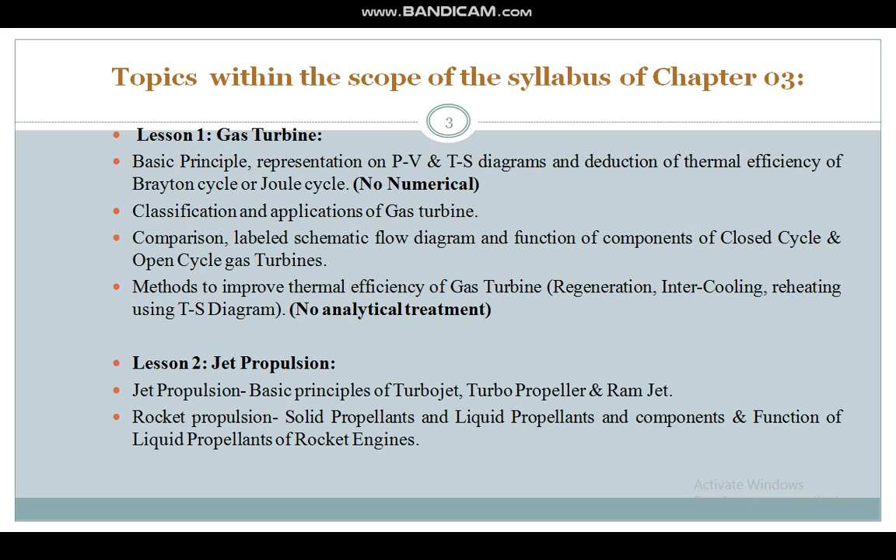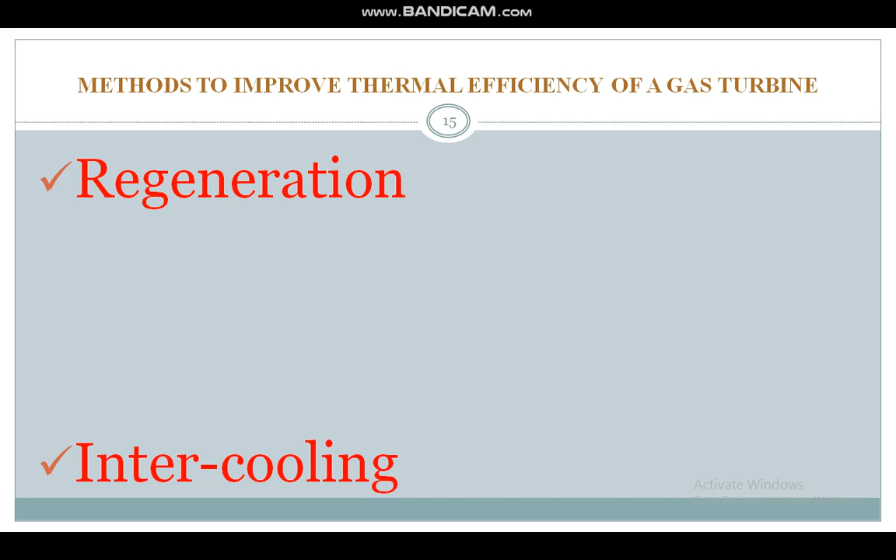There are mainly three methods for improving the thermal efficiency of gas turbine: regeneration, intercooling, and reheating.

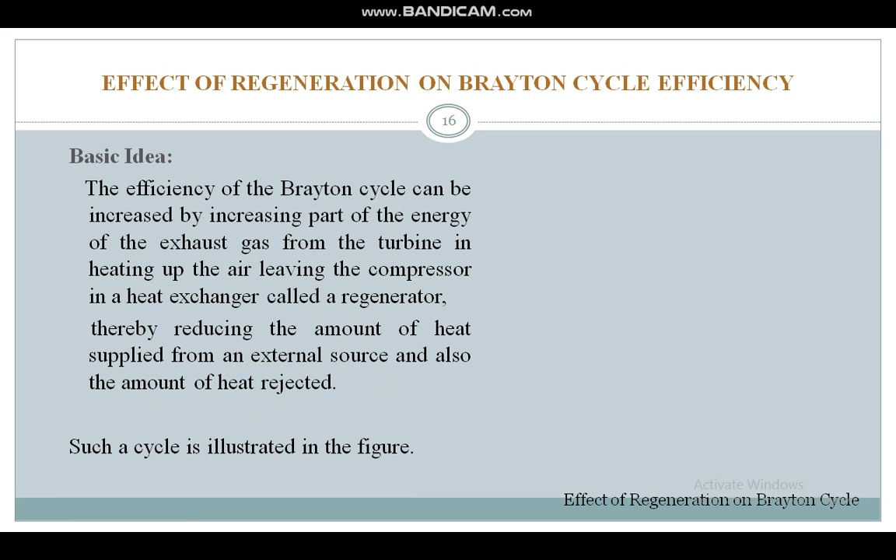Let us first talk about the effect of regeneration on Brayton cycle. Now, what is regeneration? What is the basic idea? The efficiency of the Brayton cycle can be increased by utilizing part of the energy of the exhaust gas from the turbine in heating up the air leaving the compressor in a heat exchanger called a regenerator.

If you look at the figure, this thereby reduces the amount of heat supplied from an external source and also the amount of heat rejected. Such a cycle is illustrated in the figure.

The temperature of air leaving the turbine at 5 is higher than that of air leaving the compressor at 2. In the regenerator, the temperature of air leaving the compressor is raised by heat transfer from the turbine exhaust. The maximum temperature to which the cold air at 2 can be heated is that of T5, the turbine exhaust temperature. But practically this is possible only in an infinite heat exchanger, so in real case, T3 is less than T5.

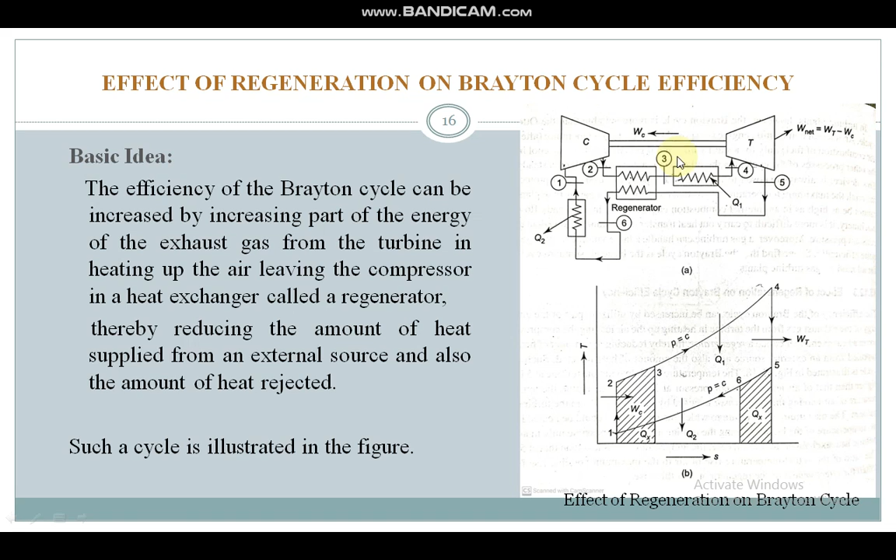The ratio of the actual temperature rise of air to the maximum possible rise in air is called the effectiveness of the regenerator. In this case, effectiveness equals the practical increase, T3 minus T2, divided by the theoretical increase, T5 minus T2.

When a regenerator is used in the idealized cycle, the heat supplied and the heat rejected are each reduced by the same amount. The mean temperature of heat addition increases and the mean temperature of heat rejection decreases because of the use of regenerator. Thus the efficiency is increased as a result, but the work output of the cycle remains unchanged.

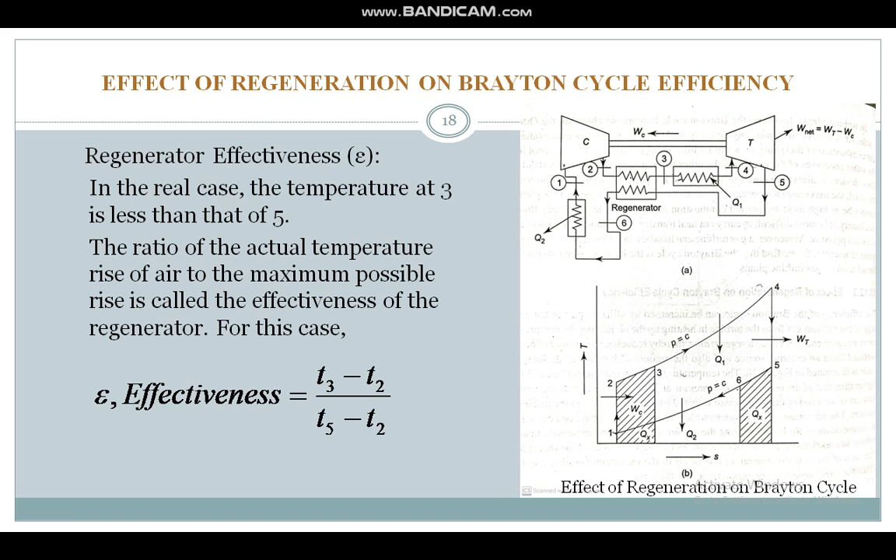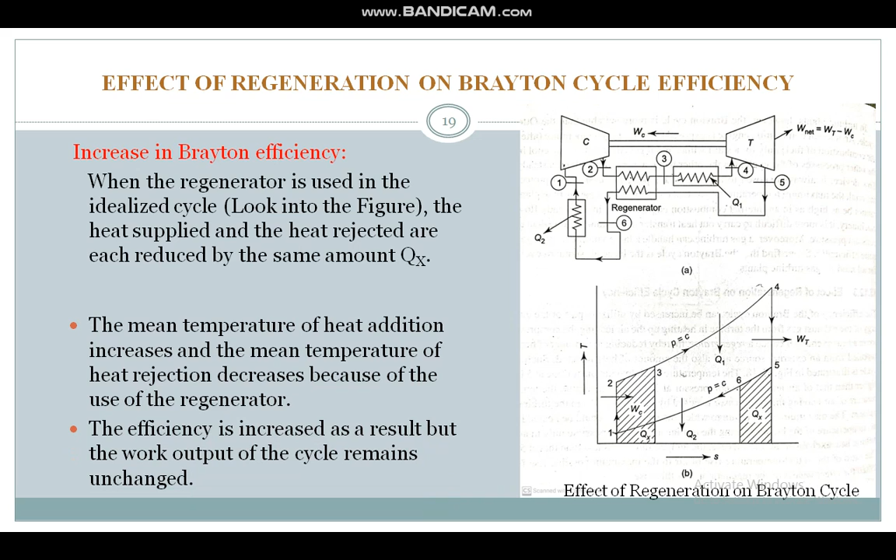Because the mean temperature of heat addition increases and that of heat rejection decreases, the efficiency increases. These are the basic equations of regeneration.

Now some issues: in practice, a regenerator is costly, heavy, bulky, and causes pressure loss, which brings about a decrease in cycle efficiency. These factors have to be balanced against the gain in efficiency to decide whether it is worthwhile to use the regenerator or not.

Above a certain pressure ratio, the addition of a regenerator causes a loss in cycle efficiency compared to the original Brayton cycle. In this situation, the compressor discharge temperature is higher than the turbine exhaust temperature, so compressed air will be cooled in the regenerator and the exhaust gas will be heated, and our purpose will not be fulfilled.

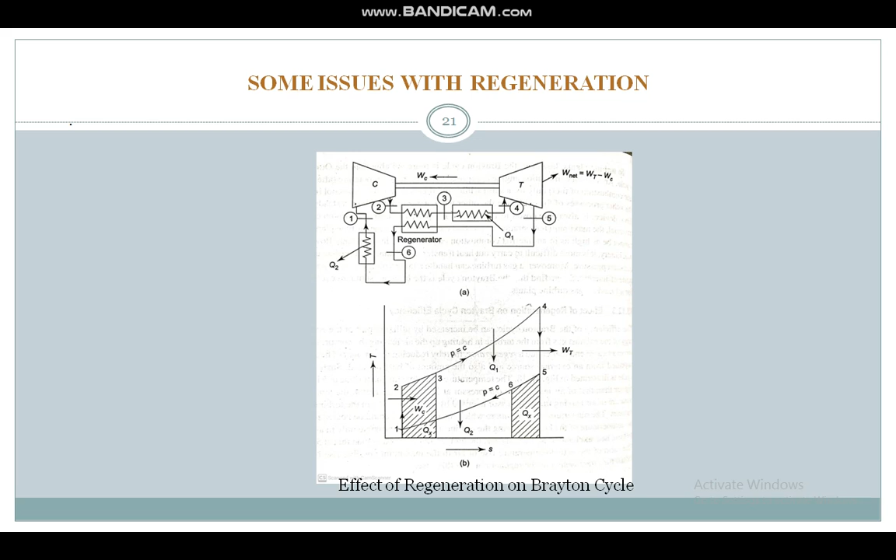As a result, both the heat supply and heat rejected are increased. However, the compressor and turbine works remain unchanged, so the cycle efficiency decreases. Also, there are irreversibilities involved in the turbine and compressors, and the Brayton cycle is highly sensitive to real machine efficiencies of turbine and compressor.

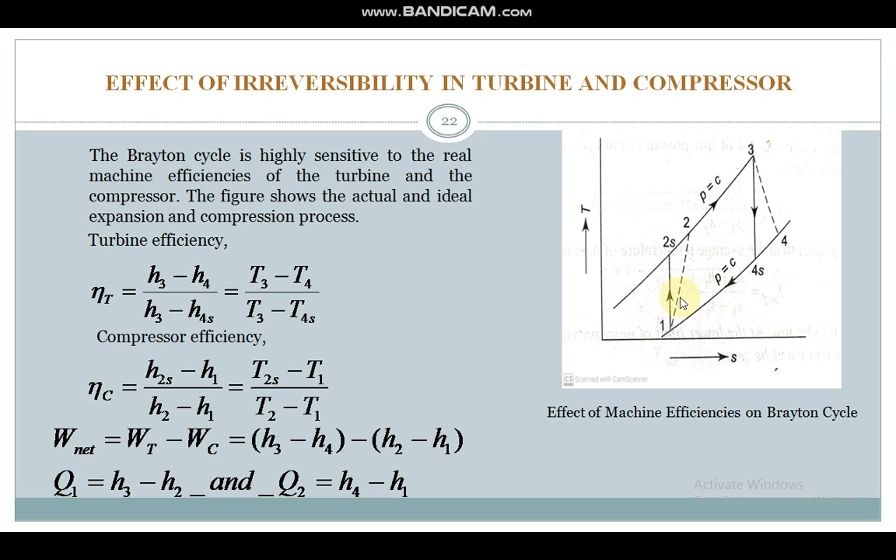For example, 3 to 4s is the isentropic process, but because of irreversibility, the actual process is 3 to 4. So clearly the work obtained from 3 to 4 in the turbine is less than the work obtained from 3 to 4s. Similarly, work consumed in the ideal case by the compressor is H2s minus H1, and in the real case it is H2 minus H1, which is more than H2s minus H1, as seen from the figure.

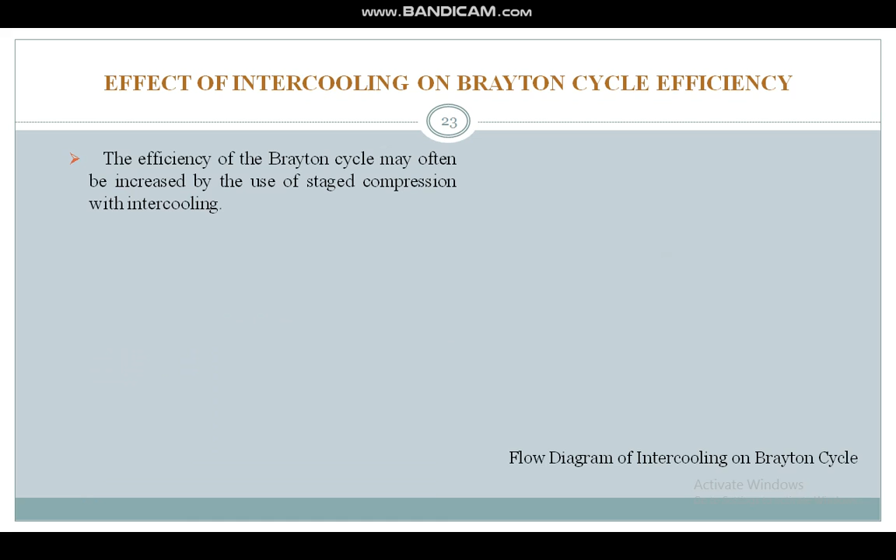Now let us discuss the effect of intercooling on Brayton efficiency. The efficiency of the Brayton cycle may often be increased by the use of staged compression with intercooling. Let the compression process be divided into two stages.

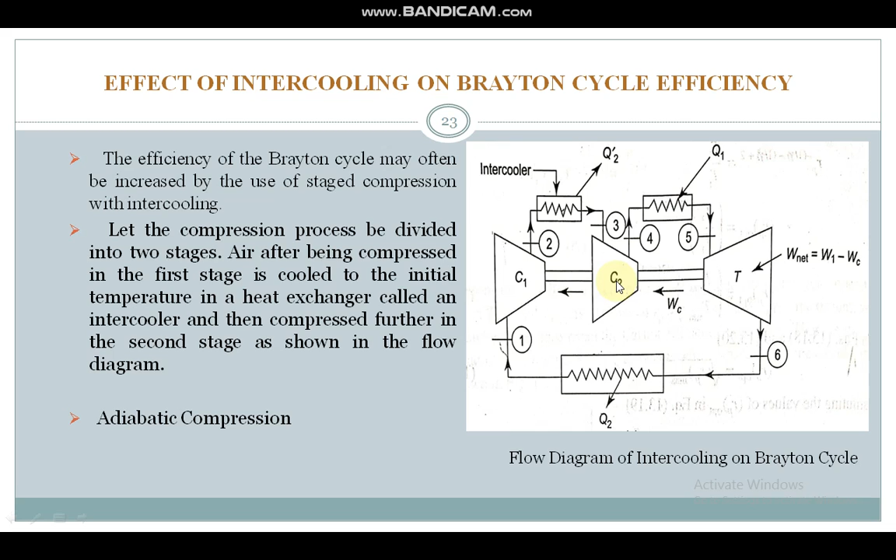Air, after being compressed in the first stage, is cooled to initial temperature by means of an intercooler. After initial compression, T2 is brought down to T1 and then sent back to the second compression stage. It will be more clear if you look at the TS diagram and PV diagram in the figure.

1 to 2 dash to 5 to 6, this was the basic cycle without intercooling, having single stage compression. And 1-2-3-4-5-6-1 is the cycle with intercooling, having two stage compression. Thus the portion 2-3-4-2 dash is added to the basic cycle, so the area increased, meaning work obtained, will be more. Now there is more heat supply also.

For the cycle 2-3-4-2 dash, Tm1, the mean temperature, is lower, and Tm2 is higher than that of the basic cycle 1-2 dash-5-6. So the efficiency of the cycle reduces by staging the compression and intercooling.

But if a regenerator is used, the low temperature heat addition 4 to 2 dash may be obtained by recovering energy from the exhaust gas of the turbine. So there may be a net gain in efficiency when intercooling is adopted in conjunction with a regenerator.

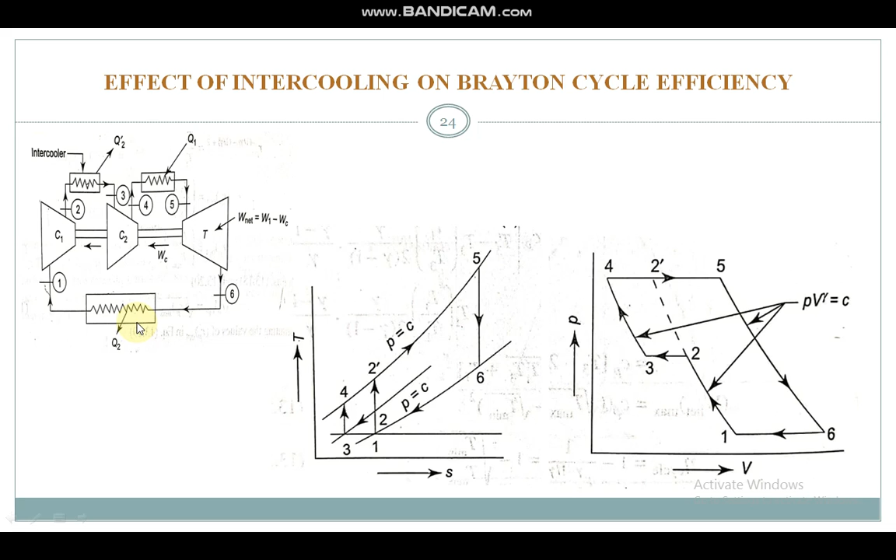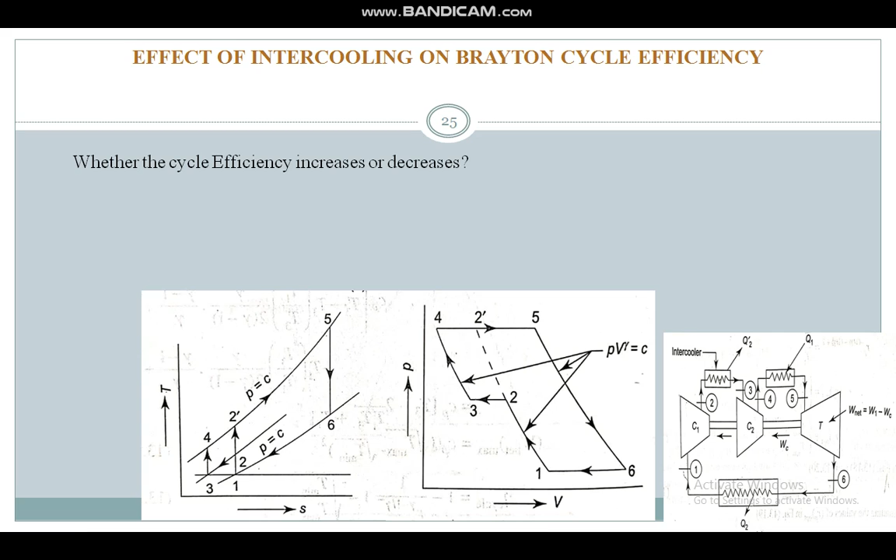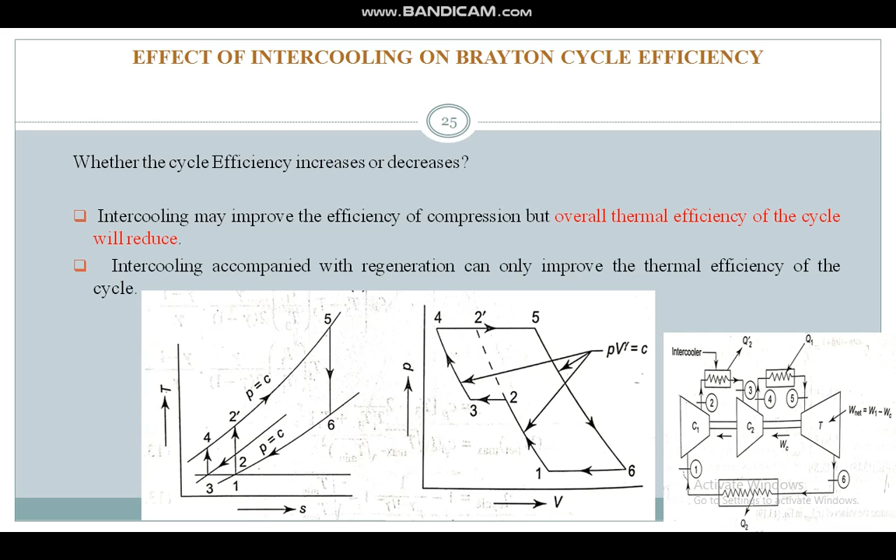As we discussed, intercooling may improve the efficiency of the compression, but the overall thermal efficiency of the cycle will decrease. The way to increase the thermal efficiency is to use intercooling accompanied with regeneration.